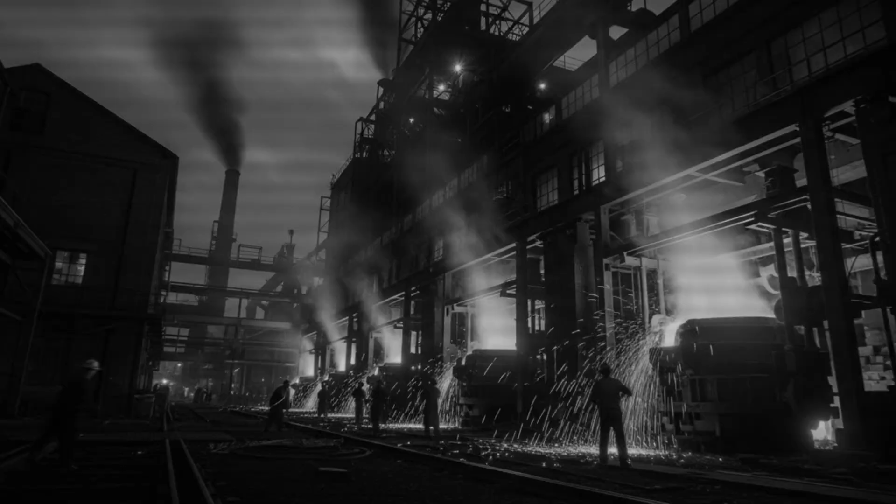As the bomb bay doors opened and thousands of pounds of explosives fell toward the factories below, German fighters swarmed in. Messerschmitts and Focke-Wulfs tore through the bomber streams. Tracer fire stitched the sky. Aircraft burned. Crews bailed out. Others vanished in spirals of smoke. By the end of the day, 60 B-17s were gone. Over 600 airmen were missing. More than 100 were dead.

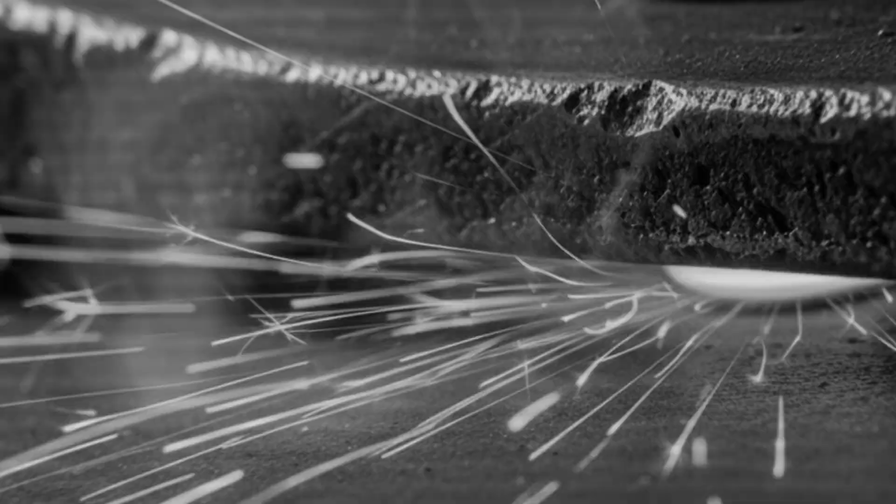While American crews were dying over Bavaria in an attempt to cripple German bearing production, something deeply ironic was happening thousands of miles away, in quiet industrial towns across the United States. American factories were already producing a bearing Germany could not easily replace, could not quickly copy, and could not stop by bombing Schweinfurt. A bearing that worked better for most military applications, a bearing that did not depend on German technology at all.

Its story began not in World War II, not in Ohio, and not even in America, but in the mind of a German immigrant carriage maker, working in the late 19th century, obsessed with a deceptively simple problem: friction.

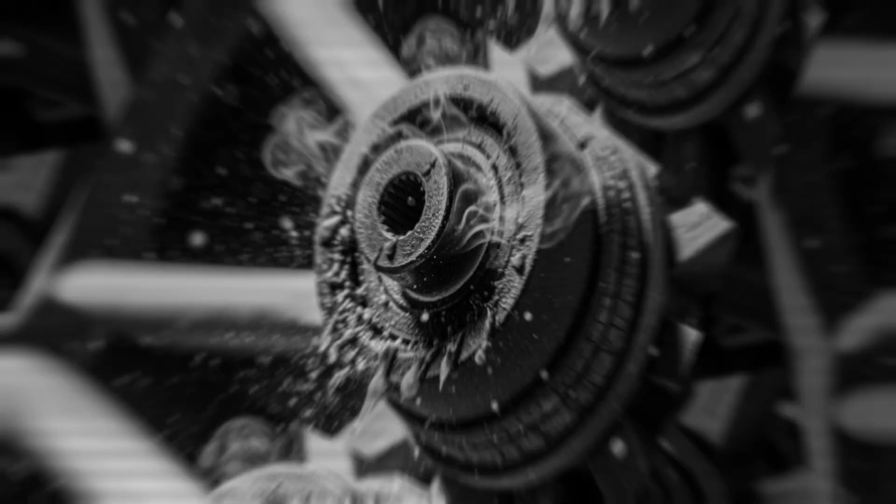Friction is the enemy of motion. Whenever two surfaces move against each other, energy is lost. Motion becomes heat. Metal wears. Efficiency collapses. From the first wagon axle to the most advanced turbine, controlling friction has always been one of engineering's central challenges. Henry Timken believed that anyone who could meaningfully reduce friction would create something of lasting value.

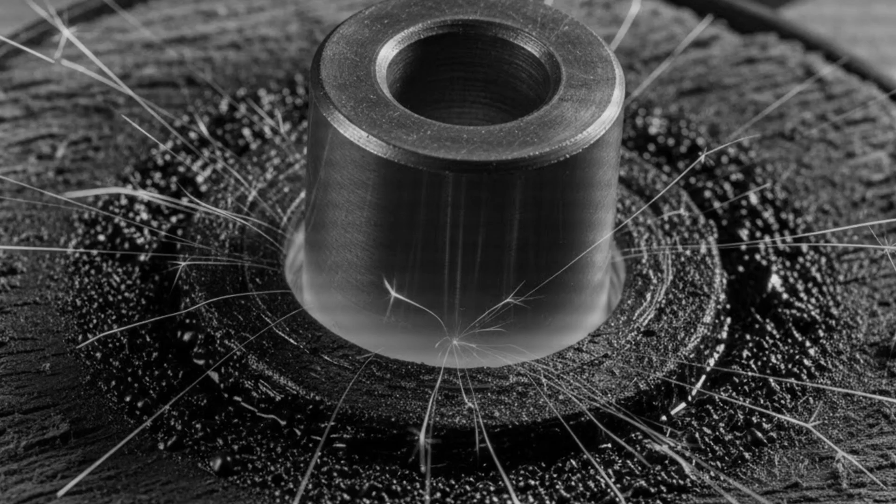He was born on August 16, 1831, in the Kingdom of Hanover, in what is now Germany. When he was 7 years old, his family emigrated to the United States, settling in Missouri. America was young, expanding, and hungry for infrastructure. Wagons, railways, machines, everything was being built, and everything depended on parts that could move reliably under load.

As a teenager, Timken apprenticed with a respected wagon and carriage maker. He learned woodworking, metalworking, and, more importantly, the realities of mechanical failure. Axles seized. Wheels wore out. Bearings failed. Every breakdown was a lesson.

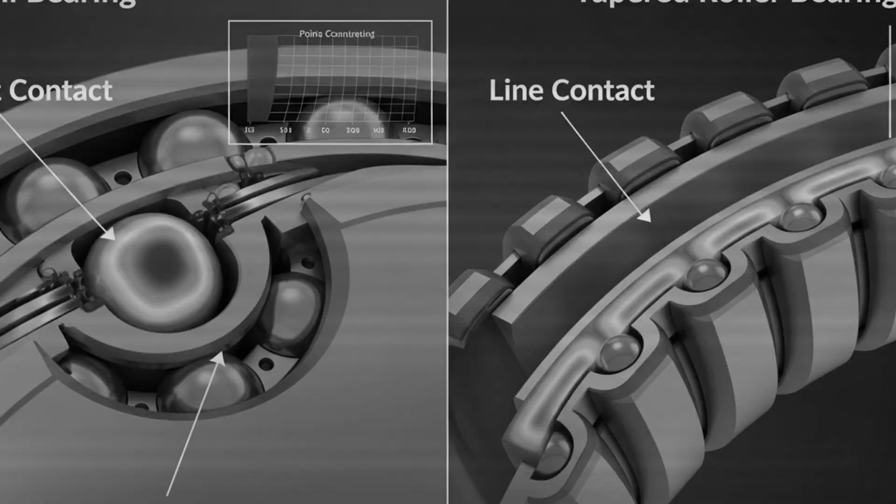By his mid-20s, Timken had opened his own carriage factory in St. Louis. He was not just a craftsman, he was an experimenter. In 1877, he patented an improved buggy spring that distributed load more effectively and survived rough roads better than existing designs. The spring was widely adopted across America and produced under license by multiple manufacturers, generating steady royalty income.

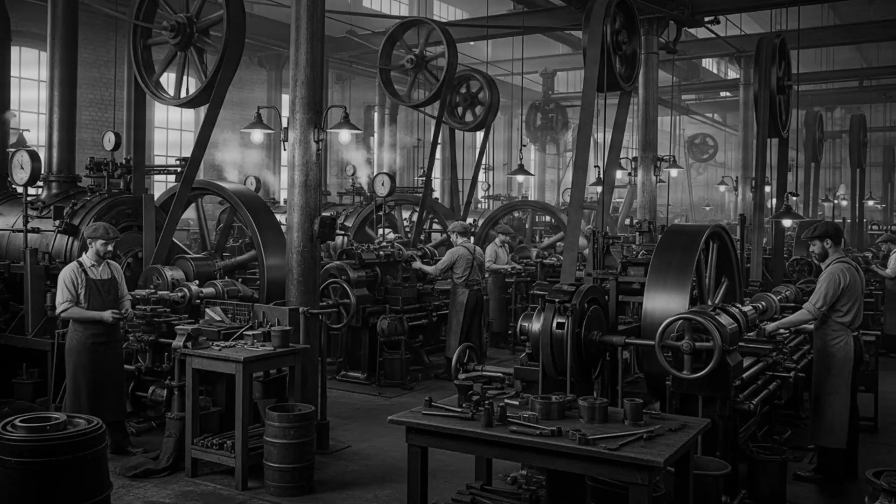The success of the spring brought Timken financial security and time, time to think. By the 1890s, he became increasingly focused on friction in wheel assemblies. Traditional bearings of the era were crude by modern standards. Most wagon wheels relied on plain bearings, simple metal surfaces sliding against each other, lubricated with grease. These worked, but they wasted enormous amounts of energy and wore out quickly under load.

Ball bearings, which used hardened steel spheres rolling between two races, were a major improvement. They dramatically reduced friction and were ideal for light loads and high rotational speeds. But Timken noticed a recurring problem: wagon wheels did not experience simple, straight-down loads. They carried weight vertically, yes, but when a wagon turned, or hit uneven ground, or carried heavy cargo, the wheels experienced side loads and thrust loads at the same time. Ball bearings struggled under these combined forces. Their point contact concentrated stress, causing rapid wear and failure. Timken believed there had to be a better way.

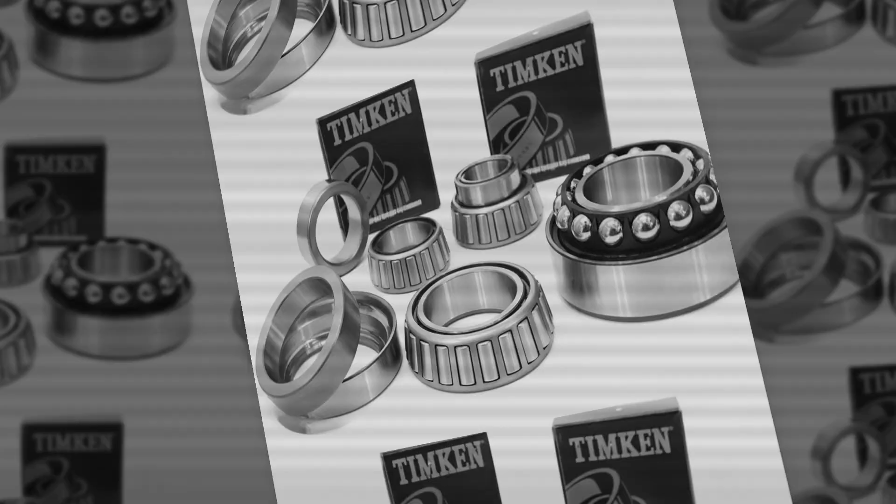With the help of his two sons and a nephew, he began experimenting. The solution they developed was elegant and radical. Instead of balls, they used rollers, but not cylindrical ones. The rollers were tapered, shaped like truncated cones, and arranged at precise angles between matching conical races. This geometry meant that loads were distributed along a line of contact instead of a single point. The bearing could handle radial loads and thrust loads simultaneously, exactly what vehicle wheels demanded.

On May 1, 1898, Henry Timken was granted patents for the tapered roller bearing. The impact of the invention was profound. Compared to ball bearings of similar size, Timken's design could carry several times the load, run cooler, last longer, and be adjusted as it wore.

It transformed the way heavy machinery could be built. In 1899, Timken incorporated the Timken Roller Bearing Axle Company, initially operating from a corner of his existing carriage factory in St. Louis. Demand exploded almost immediately.

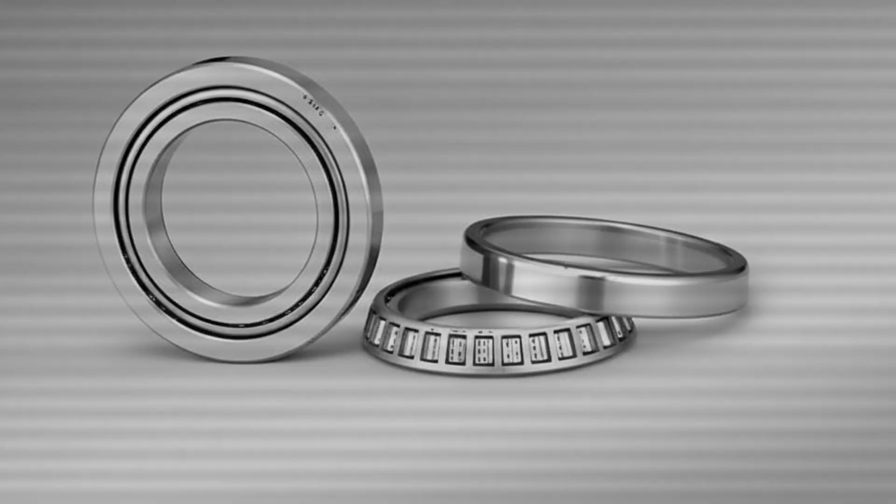By 1901, it was clear that the company needed to be closer to America's emerging industrial heartland. Timken relocated operations to Canton, Ohio, strategically positioned near steel suppliers, rail networks, and the growing automotive industry centered in Detroit and Cleveland.

While Timken was refining roller bearings in America, Europe, and Germany in particular, dominated ball bearing production. German engineers had pioneered precision steel manufacturing decades earlier. In 1883, Friedrich Fischer developed a machine capable of mass-producing hardened steel balls with unprecedented accuracy. His factory in Schweinfurt became the foundation of what would grow into one of the world's largest bearing conglomerates.

Other companies followed. By the early 20th century, German and Swedish manufacturers, most notably SKF, had built global bearing empires. They controlled advanced metallurgy, grinding techniques, and international distribution networks. Before World War I, the majority of ball bearings used in American industry were imported from Germany.

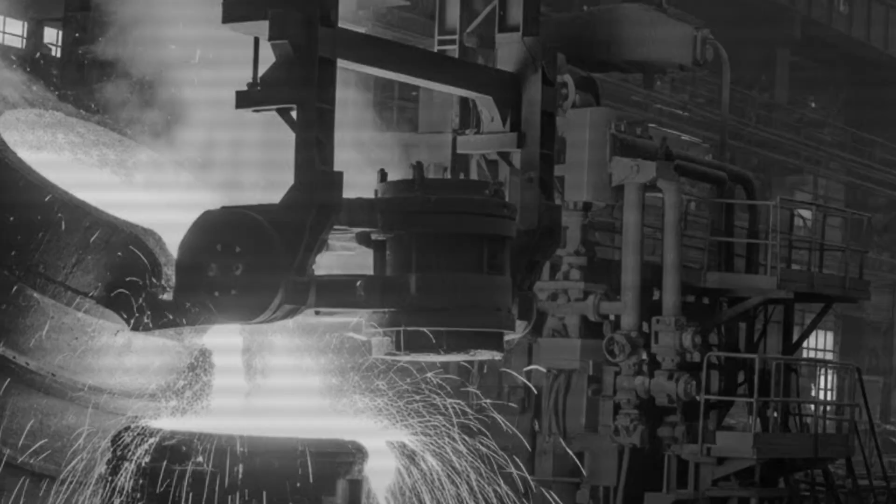Timken himself traveled to Europe in the 1890s, visiting German workshops and observing early internal combustion engines from Daimler and Benz. He understood how far ahead Europe was in precision manufacturing. But he also saw something they did not. European firms were perfecting ball bearings because that was the technology they knew. Timken's tapered roller design addressed a different class of problems: heavy loads, combined forces, durability over speed.

By 1920, the Timken company produced roughly 90% of all tapered roller bearings made in the United States. Railroads were early adopters. Tests on streetcars and freight wagons demonstrated dramatic reductions in maintenance and fuel consumption. High-speed passenger trains soon followed. Locomotives equipped with Timken bearings ran faster, farther, and cooler. The technology spread quietly, steadily, without headlines.

When World War I erupted in 1914, Germany's dominance in ball bearing production suddenly became a strategic vulnerability for everyone else. The British naval blockade cut off German exports. American manufacturers dependent on imported bearings faced shortages and soaring prices. Replacing ball bearings was not easy. Precision ball production required specialized machinery and skills concentrated almost entirely in Germany.

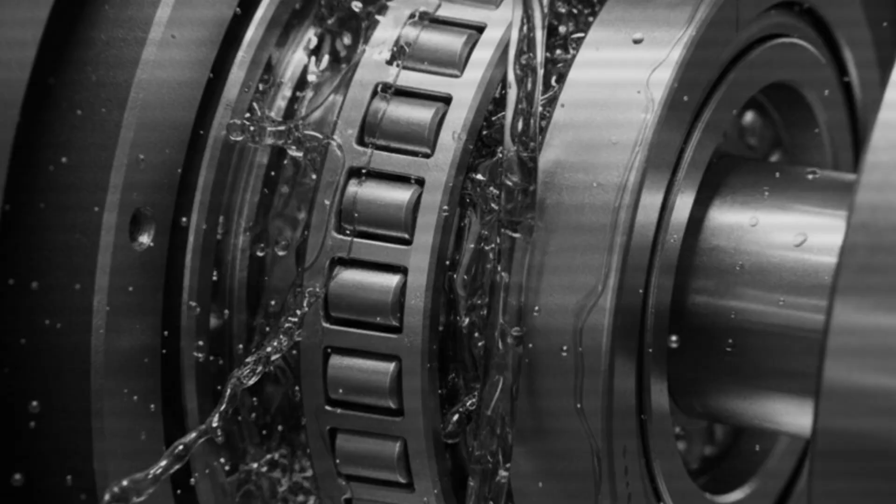Timken, however, was in a different position. Its factories already produced a bearing that could replace ball bearings in most heavy applications, and often outperform them. Trucks, artillery, rail equipment, and industrial machinery all transitioned to tapered rollers with minimal redesign. The war revealed something critical: dependence on a single foreign technology could cripple an entire industrial economy.

Timken learned another lesson as well: control of materials mattered as much as design. In 1917, facing steel shortages and inconsistent quality, the company began producing its own bearing steel in Canton. Vertical integration allowed complete control over chemistry, heat treatment, and cleanliness, factors absolutely essential for bearing reliability. This decision would echo through history.

Henry Timken did not live to see the full impact of his invention. He died in 1909. But his sons carried the company forward, expanding production, entering global markets, and quietly embedding tapered roller bearings into the backbone of modern industry. By the 1930s, Timken was one of America's most stable industrial firms, diversified across rail, automotive, agriculture, machine tools, and heavy equipment. When the world slid toward war again, the company was ready.

By 1943, Allied strategists believed that Germany's ball bearing industry was the Achilles heel of the Reich. Intelligence reports identified Schweinfurt as the critical node. What they did not fully appreciate was that Germany's enemies were not equally vulnerable.

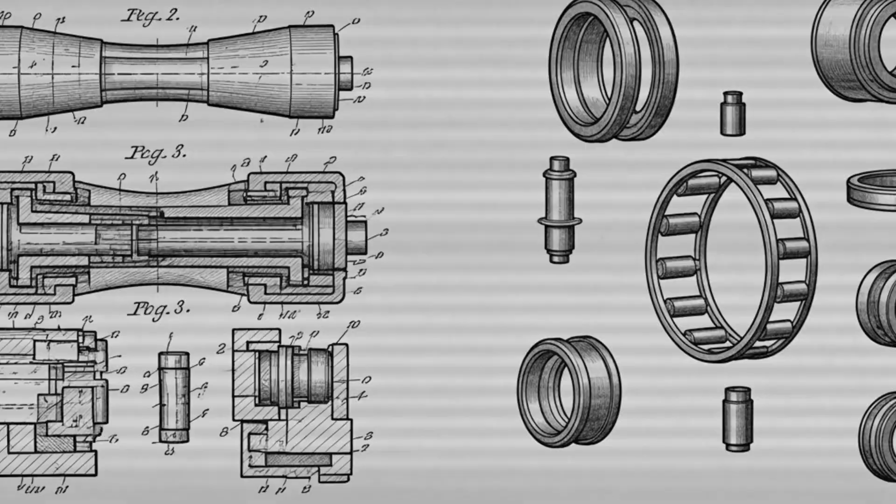Timken plants ran day and night. New facilities opened across Ohio. The company produced bearings for nearly every piece of Allied equipment. Every Jeep used 24 Timken bearings. Hundreds of thousands of Jeeps rolled off assembly lines. Trucks, tanks, artillery, aircraft landing gear, ship propeller shafts, all depended on bearings that could survive shock, dirt, overload, and neglect.

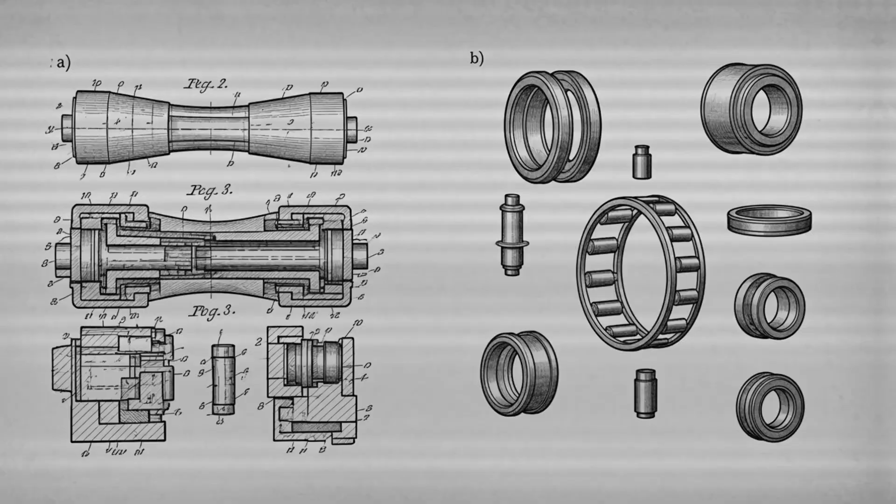Tapered roller bearings did exactly that. They carried more load. They lasted longer. They could be adjusted instead of replaced. And they were made entirely within the United States, from steel to finished product. While Germany scrambled to protect centralized ball bearing plants, America quietly solved the problem by not needing them.

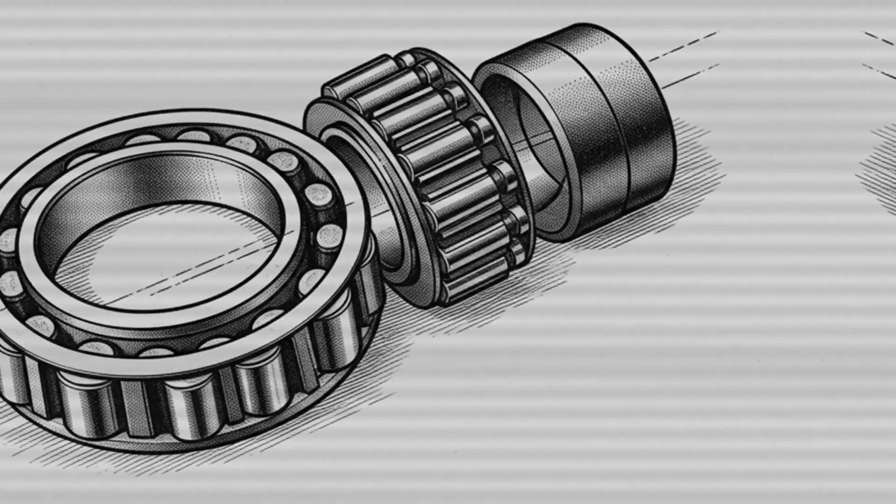The physics behind that advantage were simple, but devastatingly effective. A ball bearing touches its race at a point. Under load, that point deforms slightly into a tiny oval, but the contact area remains extremely small. Stress concentrates intensely at that spot. Under heavy combined loads, only a few balls carry most of the force, accelerating fatigue and failure.

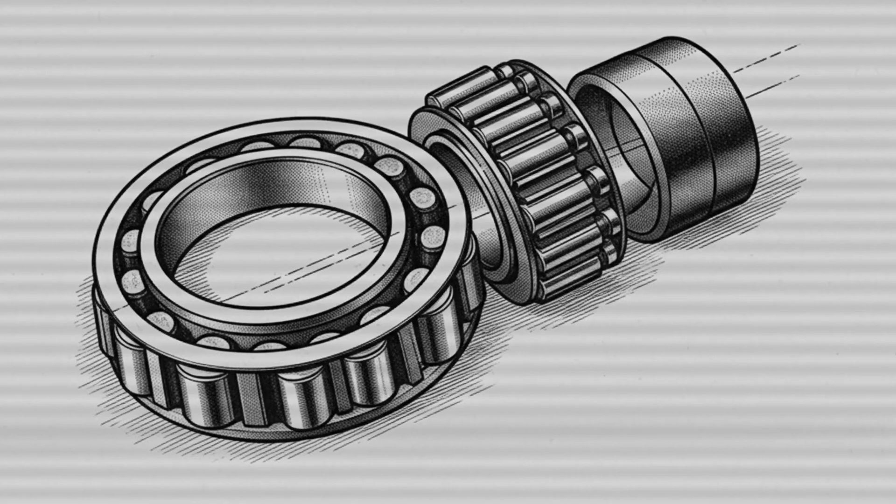A tapered roller bearing works differently. Each roller contacts its race along a line. Under load, that line spreads into a narrow rectangle, dramatically increasing contact area. Stress is distributed instead of concentrated.

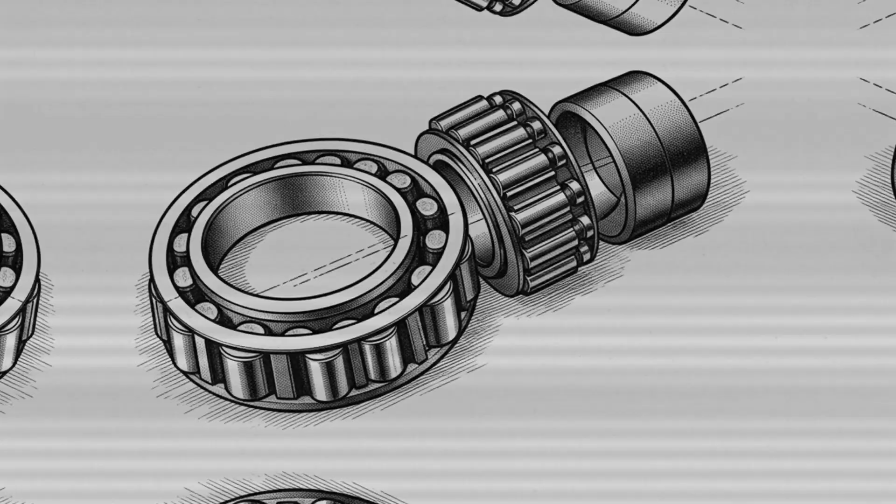All rollers share the load more evenly because of the bearing's geometry. Heat dissipates faster, wear slows, service life extends. For high-speed, light-load applications like electric motors, instruments, and machine tools, ball bearings remained ideal. But for military vehicles grinding through mud, shock, and neglect, tapered rollers were superior.

German engineers understood this in theory, but theory does not win wars. By the time World War II began, Germany's bearing industry was deeply invested in ball bearing production. Retooling factories, retraining workers, redesigning equipment, all of it would have required time Germany did not have. War freezes technology in place. You fight with what you already make.

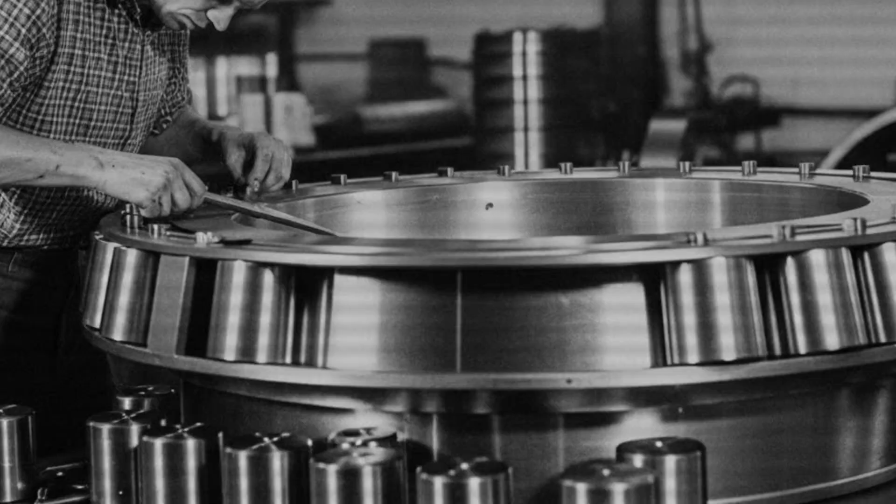America, by contrast, entered the war with dispersed, vertically integrated bearing production built around tapered rollers. The difference would never appear on a battlefield map, but it would shape every battlefield outcome.

After the disastrous Schweinfurt raids of 1943, Allied bombing strategy shifted. Long-range fighter escorts were still unavailable. Loss rates were unsustainable. The ball-bearing campaign faded into history as one of the most costly air offensives with the least decisive results. German armaments minister Albert Speer later admitted that concentrated attacks might have crippled production, but only if sustained.

They were not. Germany adapted. Underground facilities replaced centralized factories. Imports filled gaps. Stockpiles grew. By 1945, Germany actually held more bearing inventory than before the raids began. The airmen paid the price anyway.

But the outcome of the war did not hinge on Schweinfurt. It hinged on logistics. And logistics hinge on components that almost no one notices, until they fail.

During the war years, Timken's output more than doubled its previous peak. The company manufactured hundreds of millions of bearings. Its factories produced gun tubes, rock bits, steel tubing, and precision components that fed every branch of the Allied war machine. The Timken Ordnance Company alone produced tens of thousands of artillery barrels. New plants opened in Zanesville, Columbus, Newton Falls. Employment surged. Production never stopped.

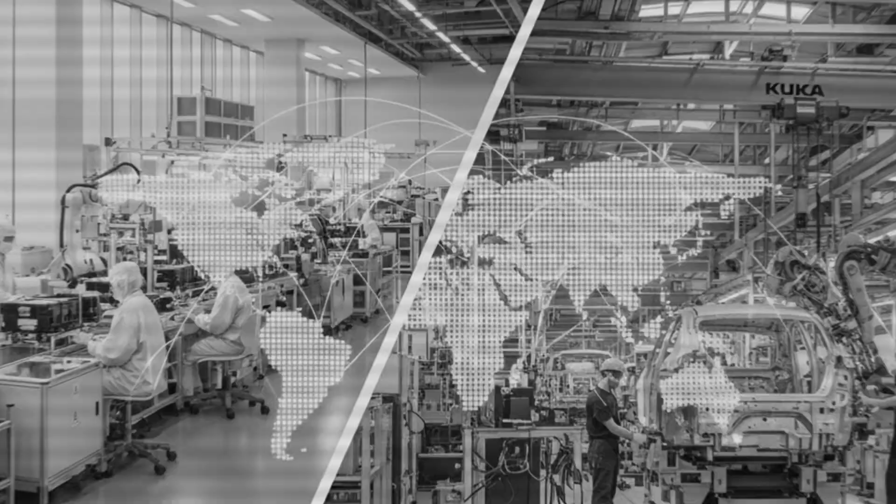Every bearing that did not fail meant one less vehicle sidelined, one less repair crew diverted, one more convoy that reached the front. The advantage compounded invisibly. German industry fought the war with chronic bearing anxiety. American industry barely thought about it.

That contrast mattered. After the war, American machinery flooded Europe under the Marshall Plan. Tractors, locomotives, factory equipment, much of it fitted with Timken bearings. European industries rebuilt using American components, not because of ideology, but because they worked.

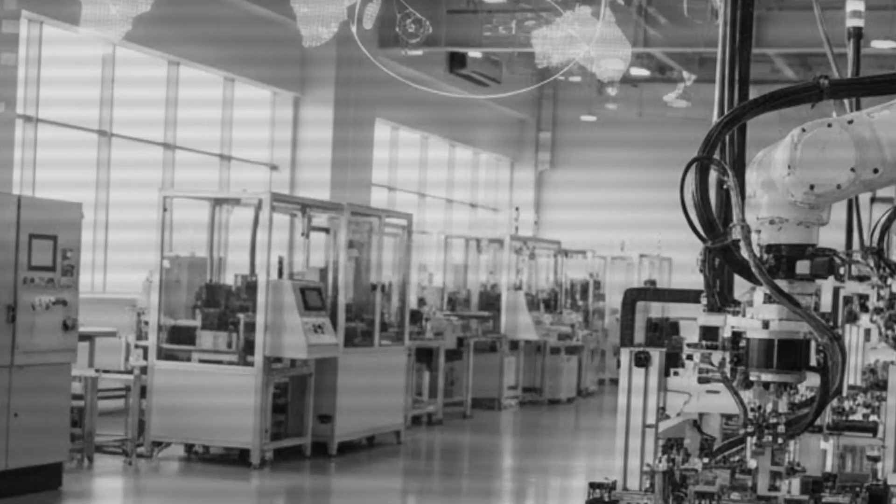Ironically, this success created legal trouble. In the post-war years, the US government pursued antitrust cases against American firms with international agreements. Timken was accused of restraining trade through territorial arrangements with its British and French affiliates, agreements originally designed to manage capacity during wartime shortages. The Supreme Court ruled against Timken in 1951. The company restructured its international operations and moved on.

The growth did not slow. By the 1960s and 1970s, Timken operated on every continent. It entered Japan, one of the world's most demanding bearing markets. It expanded across Europe, Asia, South America, and Africa. In 2003, Timken acquired Torrington, doubling its size and securing its position as a global leader.

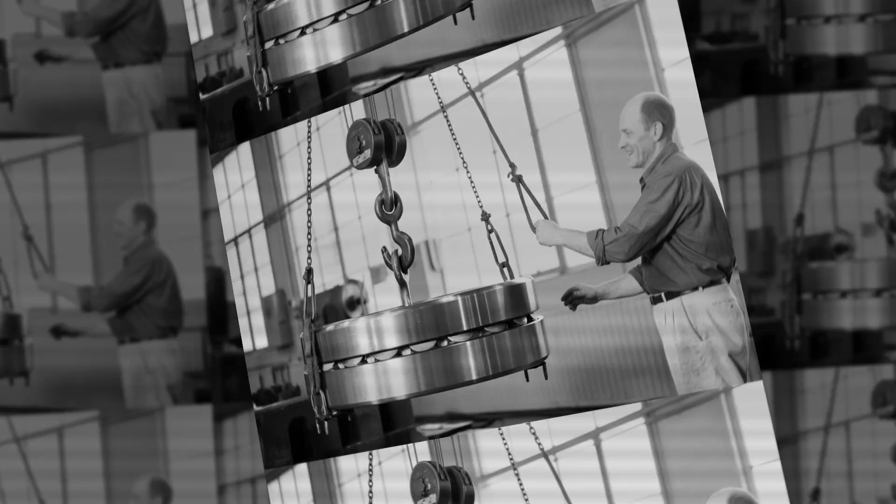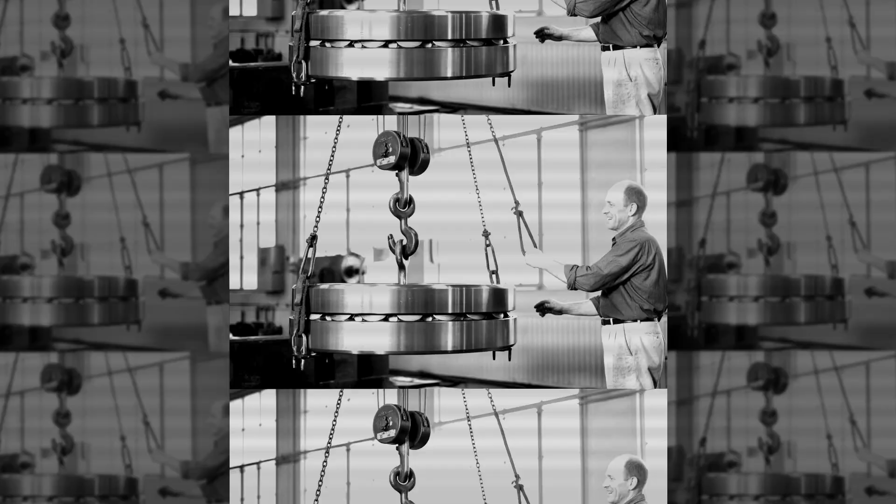In 2014, bearing and steel operations separated, allowing each business to focus independently. By the 21st century, Timken employed tens of thousands of people and generated billions in annual revenue. It manufactured not only tapered rollers, but ball bearings, spherical bearings, cylindrical bearings, thrust bearings, and precision systems for aerospace and industry. Yet tapered roller bearings remained its foundation.

From bearings small enough to fit inside computer drives to custom units weighing several tons for steel mills and wind turbines, the same geometry patented in 1898 remained central. The physics had not changed.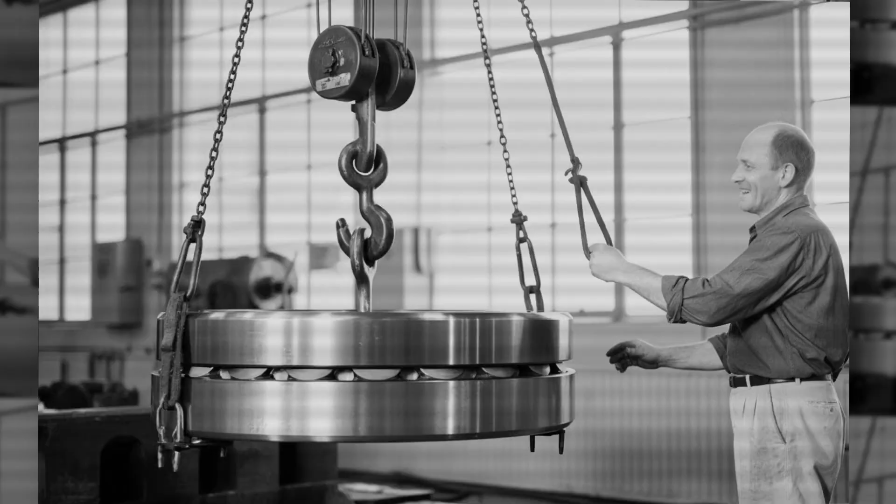The final irony of the story is this. Henry Timken was German by birth. He learned precision from German craftsmanship. He studied European engineering firsthand. But it was in America that his idea flourished, not because it was flashy, or dramatic, or politically favored, but because American industry could adopt it at scale.

Germany entered World War II dependent on centralized ball bearing production, vulnerable to bombing and blockade. America entered the war with diversified bearing technology, domestic steel production, and a design better suited to the realities of military machinery. No general ever gave a speech about bearings.

No medal was awarded for reducing friction. But armies do not move on speeches. They move on axles. And axles move on bearings.

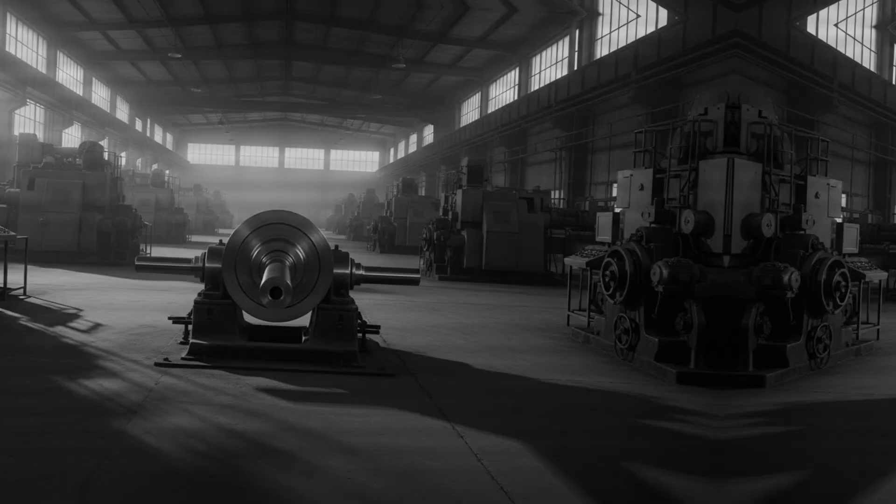While bombers burned over Bavaria trying to destroy German factories, American plants in Ohio quietly produced something better. Not through daring raids or grand strategy, but through patient engineering and relentless manufacturing. The bearing war was not won in the sky. It was won on factory floors, where an immigrant carriage maker's idea rolled off production lines by the millions.

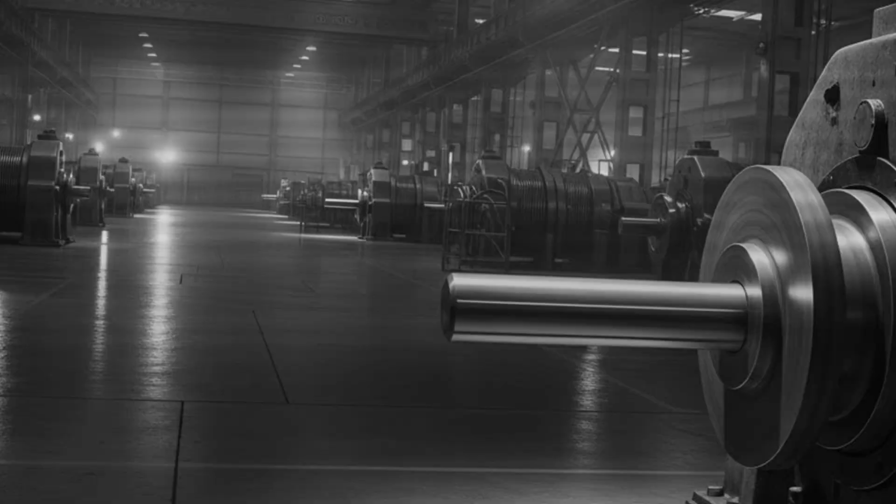Henry Timken never set out to influence global conflict. He wanted to build a better wagon. In doing so, he solved a problem that generals could not, and helped ensure that when the greatest war in history came, American machines kept moving. Friction was reduced. Motion continued. And victory followed.